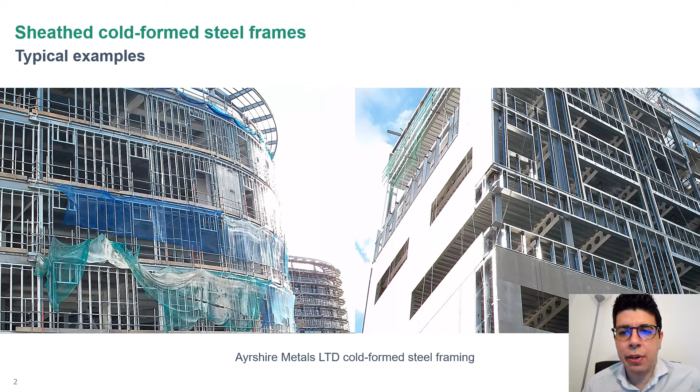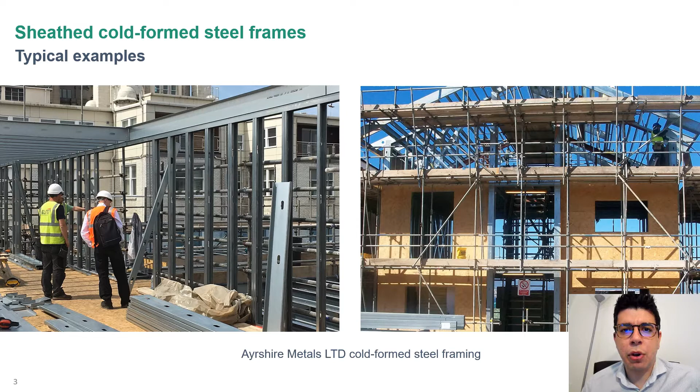Similarly, vertical members, known as studs, with service holes in the web of members, are shown on the left photo of a frame during construction, while on the right photograph, cold-form steel frames sheathed with oriented strand boards, or OSB, are illustrated. A cold-form steel frame is made out of studs, the columns, which are set in a horizontal track.

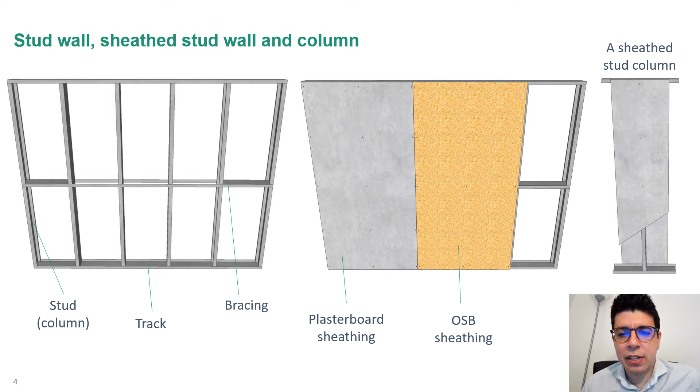Member at the ends. The studs are typically braced at mid-level by additional horizontal members. Typical sheathing used in construction and considered in this study are plasterboards and OSB.

A load-bearing sheathed stud should be able to withstand compression load due to overhead action and resist lateral action about its major axis, which can be the result of forces such as wind. A member under combined effect of both of these forces is said to behave as a beam column.

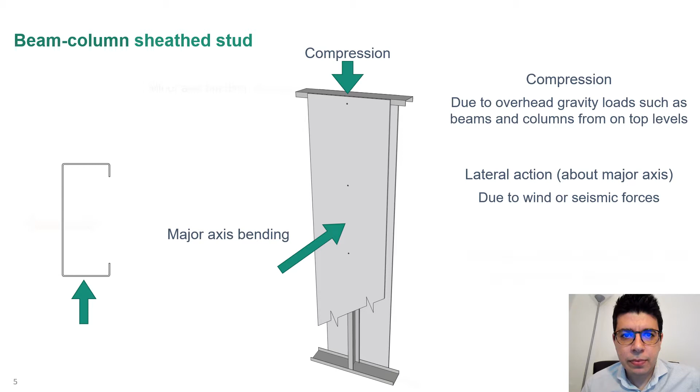There can be another action acting in the minor axis of the column, again as a result from lateral actions such as wind or seismic forces, where the whole wall can resist them acting in a diaphragm action, but this is not considered in the current study.

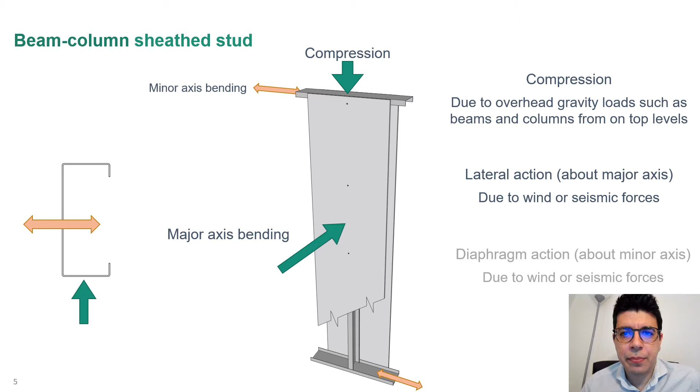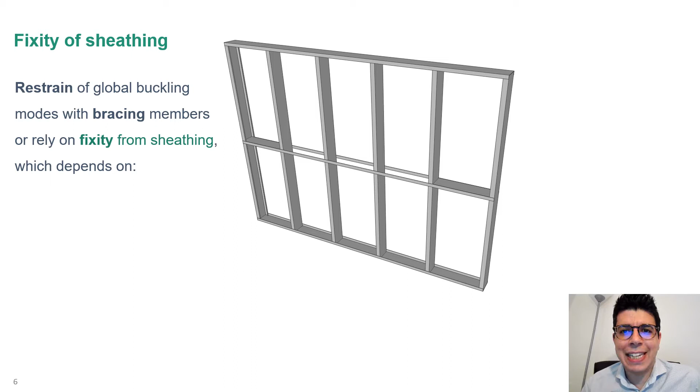Bracing members are typically used in the industry to restrain global buckling. One of the main objectives of this study is to illustrate that restraint can also result from the presence of sheathing, whose fixity on the stud depends on the number of screw connectors, the type of board material, and the type of connector fixings. A series of full-scale tests on single sheathed studs under combined compression were carried out.

A total of 17 member tests were conducted, with 8 specimens subjected to pure compression, 6 to combined compression and bending, and 3 to pure bending.

6 of the specimens under pure compression were sheathed with plasterboard and 2 with OSB. For the specimens sheathed with plasterboard, 4 connector spacings were examined, connected at 600, 300, 150, and 75 mm, while for the specimens sheathed with OSB, only the 2 extreme spacings of 600 mm and 75 mm were studied.

Following testing of the plasterboard specimens under pure compression, and since pull-through failure was prominent, it was decided that the specimens to be tested under combined loading and pure bending would be sheathed with OSB only, with connectors spaced at 600 and 75 mm only. 6 tests were conducted under combined load, where the axial level was set to 75, 50, and 25% of the stud compression resistance.

This had been determined based on the 2 tests with OSB sheathing under pure compression. The tested members were sheathed with the same type of board and using the same number of screws on both sides.

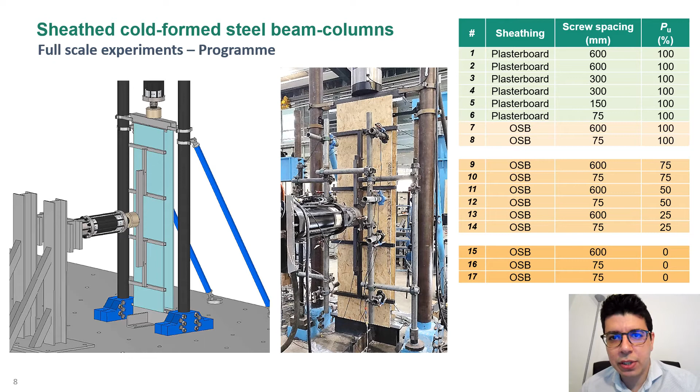The specimens were tested in a dual actuator rig. Axial compression was applied to the overhead track by a vertical actuator, while bending was applied by laterally loading the sheathing using a 4-line 2-tier whiffle tree system connected to a horizontal actuator in order to approximate a uniform distributed load.

The height of the stud was 2.4 meters, the width of the sheathing 600 mm, while the length of the tracks of the tested specimens was 800 mm.

For low axial load levels, the boundary conditions were approximately pinned, while for higher axial load levels, increased end fixity arose. Specimens in pure compression behaved like fully fixed ended.

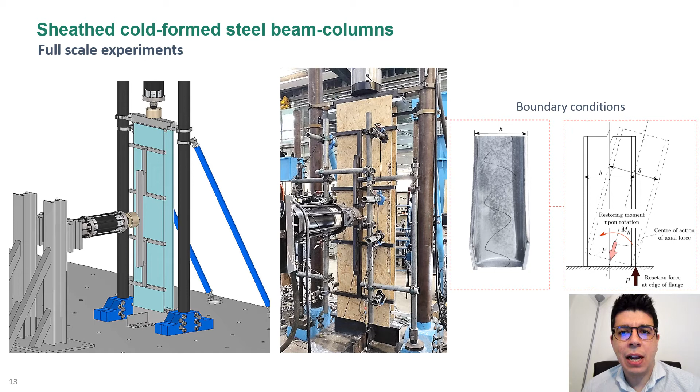The specimens were C-lipped shaped, 150 mm deep, 44 mm wide, and 1.5 mm thick. The steel's material yield strength was determined as 482 MPa with the use of tensile coupon tests.

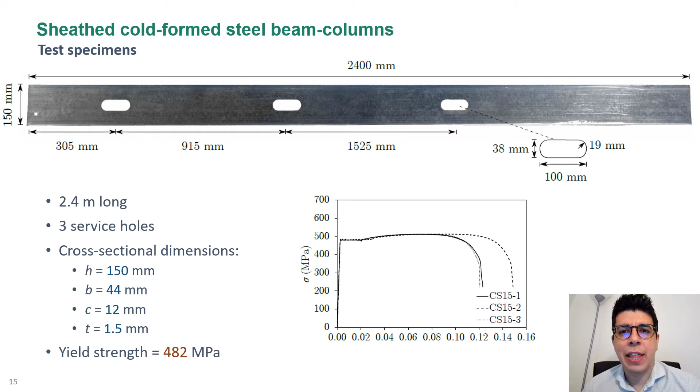It is also worth mentioning that a series of material tests were carried out for both types of sheathing, OSB and plasterboard, to determine the material properties, as well as a series of pull-through tests and push-out tests to determine the capacities of screws in a sheathing to steel component system.

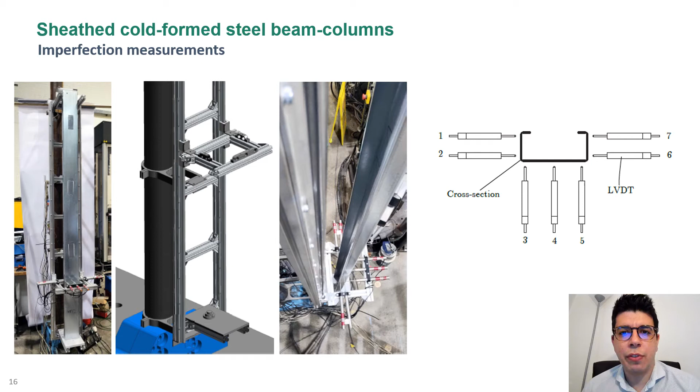These measurements varied along the length of the specimen, as shown in the two graphs on the right. Measurements were carried out for 10 specimens with service holes and 10 without. The table summarizes the average results for each set.

The measured imperfection amplitudes for the members with and without holes show no significant discrepancies for the local, distortional, torsional, and global major axis flexure modes.

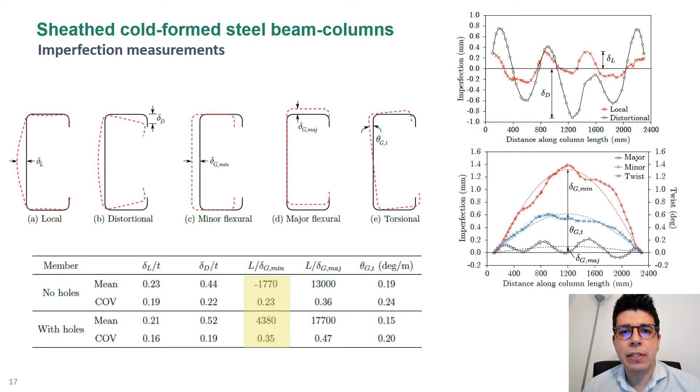Conversely, both the magnitude and direction of the minor axis bow imperfections were affected by the presence of the holes. This is attributed to the influence of the hole punching process.

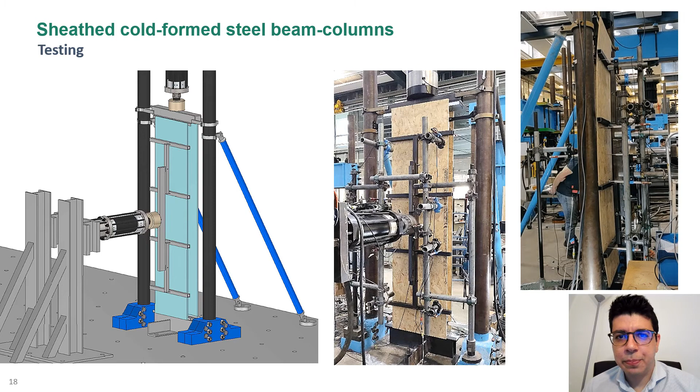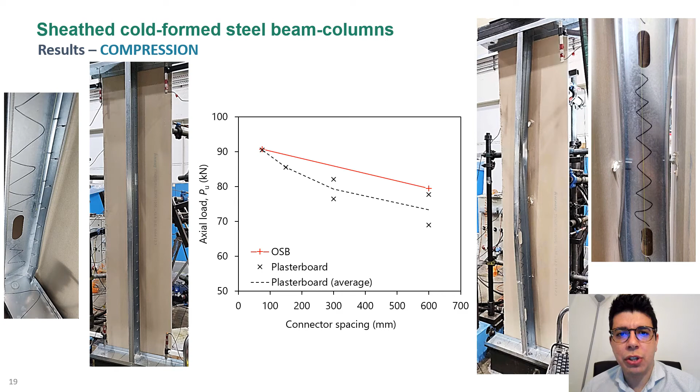For all the specimens connected at 300 and 600 mm intervals with plasterboard, pull-through failure of the connectors took place. For the plasterboard sheet specimens connected at 75 mm and both OSB sheet specimens, no connector failure was observed.

The axial load displacement curves for the OSB sheet specimens are shown in the figure on the left, while the corresponding curves for the specimens sheeted with plasterboard are shown on the right.

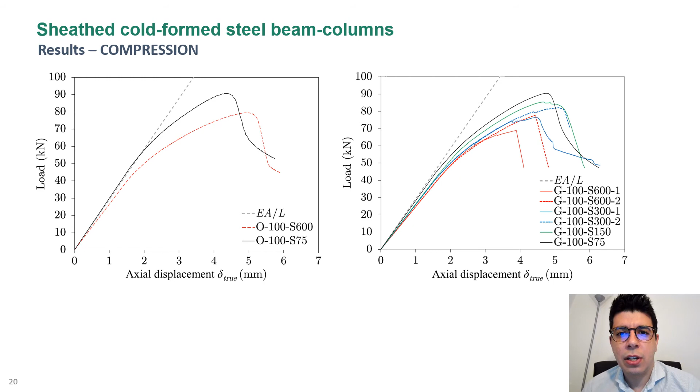The discontinuities that can be seen in the specimens sheeted with plasterboard at spacings of 600, 300, and 150 mm correspond to failure of individual connectors.

It should be mentioned that the capacity of the specimens tested under pure bending was limited by the strength of the connection between the track and the column.

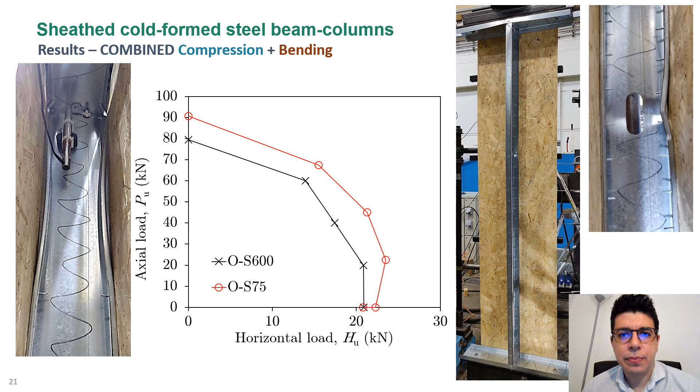and major axis bending respectively, with the horizontal test load converted to bending in accordance with the loading conditions in the tests. The cross-sectional resistances were determined following the effective width method given in Eurocode 3.

The test results are about 4 to 5 times as much as the capacities given by this equation, assuming no effect from sheathing.

Assuming bracing at mid-level, which is what is typically done in current design practice for a cold-formed steel frame, the effective length about the minor axis is reduced to half.

But still, comparing this design to the test results, where no mid-bracing exists and all restraint or extra strength is provided by the presence of sheathing, the capacity is considerably underestimated.

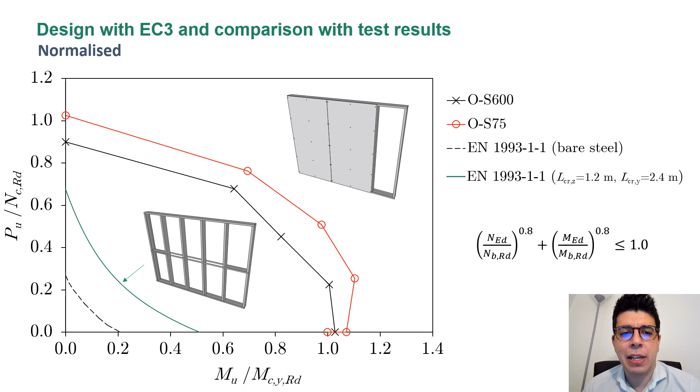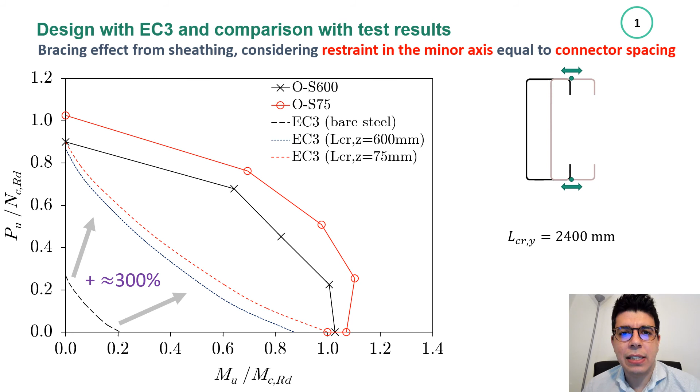Recognizing a restraint about the minor axis with an effective length equal to the connector spacing leads to about a 300% increase and much better estimations matching the test data.

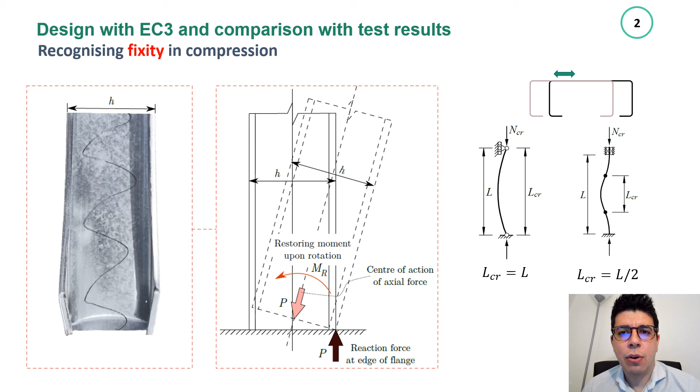As discussed before, in pure compression the end boundaries behave more like fixed-ended. As such, an effective length about the major axis of half this length may be assumed.

Assuming an effective length of half length about the major axis for pure compression, with only an effective length about the minor axis equal to connector spacing for both compression and bending, leads to further 5 to 10% improvements in compression.

As can be seen, the accuracy of the resistance predictions given in Eurocode 3 is, however, limited by the shape of the interaction curve, since the concave nature of the curve arising from the value of the power 0.8 does not match the convex trend of the test data points.

Also, further improvements can be made, especially on the bending capacity, by recognizing composite action.

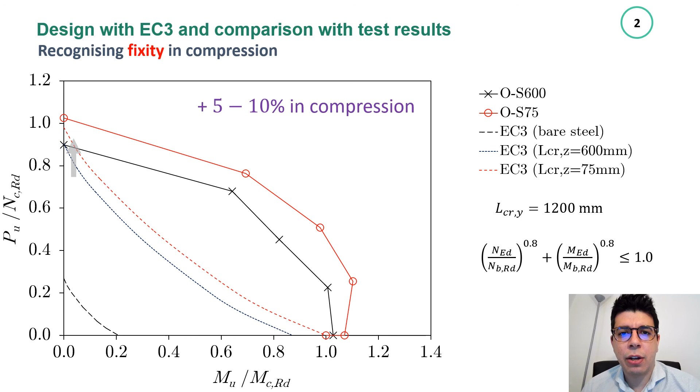Finally, certain conclusions can be made. Significant improvements can be gained by recognizing the structural effect of the sheathing through bracing and fixity, while there is potential for further improvements by recognizing composite action and the convex shape of the beam-column interaction test data.

All this, of course, assuming connector capacity is adequate. Findings show that typical connectors with OSB can achieve this, while for plasterboard the design needs to be more conservative by using either more connectors or better connectors.